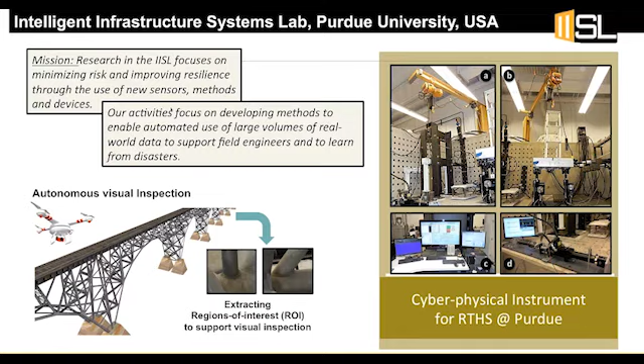Some other things that we do are related to structural health monitoring and looking at different ways to use sensors for gathering information about the condition of a structure, as well as structural control. Specifically, most of what we've done is on magnetorheological fluid dampers and how those could be used to reduce the response of different types of structures, buildings, bridges, or even automotive or aircraft applications.

But on the right-hand side here, you see this multi-hazard engineering collaboratory on hybrid simulation. And this is a new project that NSF funded, the idea being to bring together a group of researchers that can share ideas, that can build capacity for hybrid and real-time hybrid methods toward different types of applications.

This is a field where we need a lot of different input from different types of experts. For instance, we need people in control theory, as well as people in structural testing, as well as people in signal processing, etc. And so what kind of material has to be developed? What kind of theory, what kind of methodologies have to be developed to really advance this technology and turn it into something that can be used every day in our laboratories?

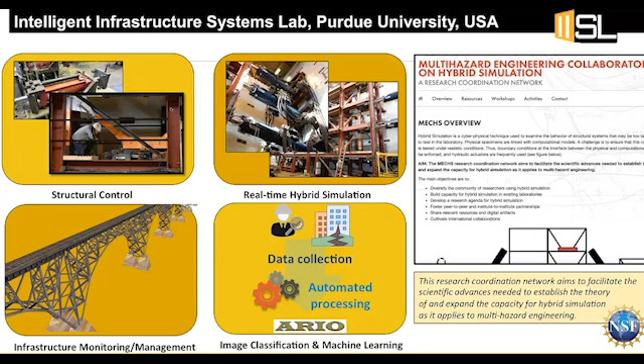So many of you, I suspect, are very familiar with dynamic testing. In civil engineering, we use dynamic testing for understanding our systems, for validating our systems. We do this at large scale because, as Art was mentioning a little while ago, it's very important to study these systems in their realistic condition at large scale, at full scale, if possible.

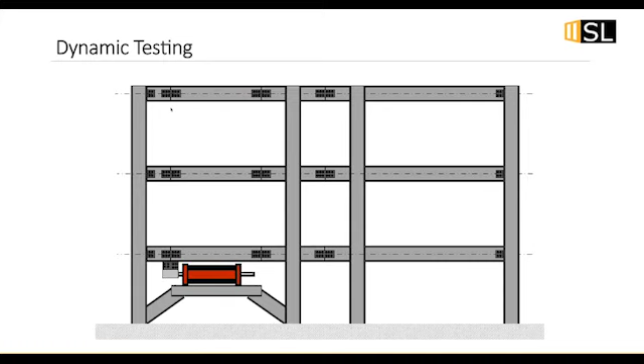This is also true in automotive applications, aircraft applications. We do a variety of dynamic testing. It's always best to test it at the largest scale possible so that we get very realistic behavior. Often in civil engineering, this is done with a shake table.

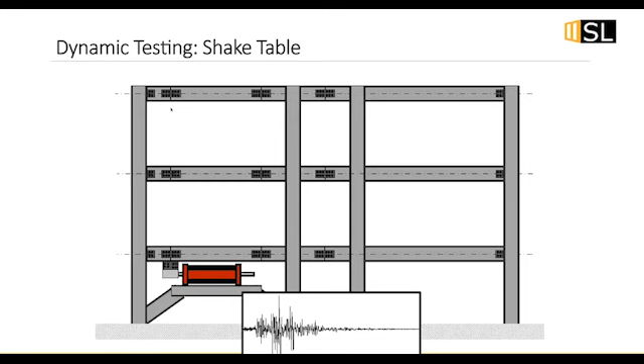This is one of the best instruments for testing full-scale systems under the most realistic situations when it comes to seismic applications. However, there's a great many challenges as well, in the sense of to test things out at full scale, you need something like this.

So this is in Miki City, Japan. This is the largest shake table in the world, and it is 15 meters by 20 meters, and it has a payload of 1,200 tons. This was built in 2005.

It was recently upgraded so that it's now a 6 degree of freedom facility in 2016. But this type of facility is extremely expensive to run as well. So it's very important for those necessary tests, but if you can do things with less cost, more rapidly, studying different scenarios very quickly, then that also gives you new opportunities to test out a variety of things in the laboratory before you take them to a facility like this.

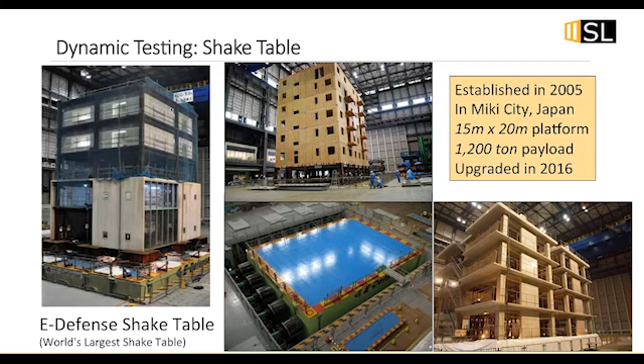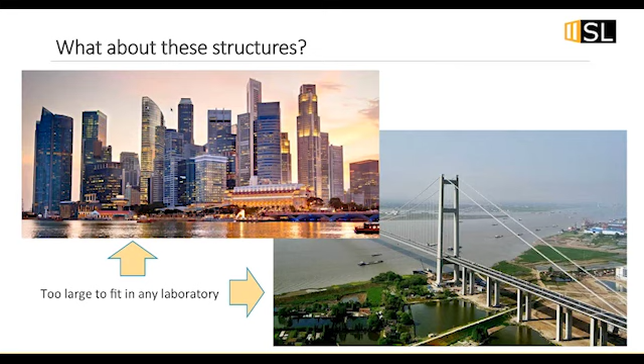And actually, even a facility like this has limitations, right? What happens when we have these long-span bridges, extremely tall buildings? We can't put even these systems in a single laboratory, even a facility as large as this one in Japan. So what we've been doing for the last several years, this is a method, I think the real-time aspect started around 2004 or 5, is to do hybrid simulation at real time.

So this is important if you have a system that has significant coupling between the physical system and the computational system. And I'll talk a little bit about how we break these up into physical and computational systems in a few slides. But real time is important when you have some sort of rate dependence in your system, or when you suspect you have rate dependence and you need to understand it.

But the advantage of this is that we can very rapidly change our computational system. The blue part of this diagram is meant to represent the computational system. The gray part is meant to represent the physical system. And I use a transfer system or a hydraulic actuator or many hydraulic actuators to impose realistic conditions upon that physical substructure based on what my computational model tells me to implement in real time.

So I'm not determining what those conditions are going to be in advance because I don't understand this physical substructure, so I can't model it. The goal is to actually, in real time, take measurements off the physical substructure and impose those on the computational substructure, and then actually bring those back into the physical substructure so that I can understand how it will respond.

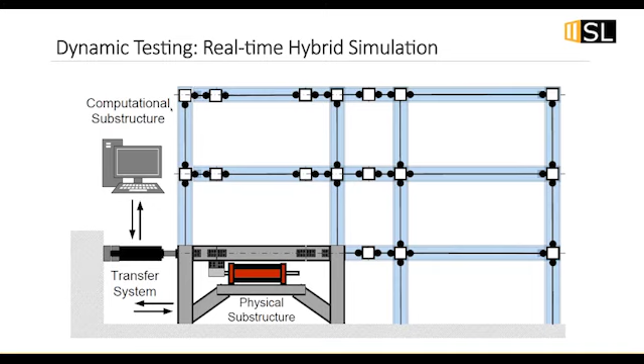And so the idea is to be as realistic as possible, but the advantage is that blue part of the structure, the computational substructure, in just a few minutes I can change to a new model. I can test a different scenario. I can test a different input. I can test it under totally different conditions using the same physical substructure if I'm not damaging that substructure, of course. This can be done with a hydraulic actuator, but it can also be done with shake tables and other types of systems, and I'll mention a little bit about that at the very end as well, some of the newest applications of this idea.

So real-time hybrid simulation is a cyber-physical, time-efficient, cost-effective technique to integrate physical testing with computational simulation. So one of the earliest frame tests that was done was this project that we had at Lehigh. This was a NEES project funded by the National Science Foundation in the United States. And it was a team of researchers, 10 faculty from 5 different universities that were all involved in doing real-time hybrid simulation.

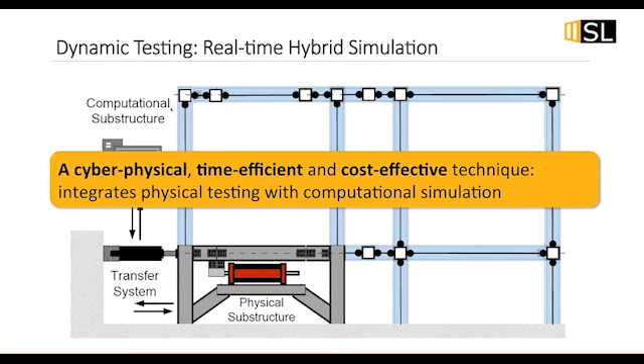You know, we had a lot of success in these tests. We had hydraulic actuators that were very large relative to our specimen, but we also had to deal with control issues that were associated with the actuator dynamics and the control structure interaction. And so this brought up a whole bunch of questions that led to some of the things that I'll talk about today.

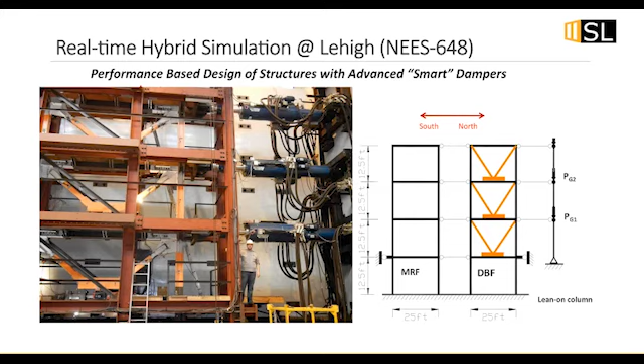So what I would like to talk about today is some of these experiences, how we dealt with those experiences, how we learned from them, and how we developed some new methodologies and procedures which we use to perform real-time hybrid simulations. Now, every time we do an experiment, that's the procedure that we basically follow.

But then I'm also going to talk about this MECHS collaboratory on hybrid simulation, the mission, things that we've been doing recently, things that may be opportunities of interest for people in the audience, but mostly how this community is breaking down barriers and building capacity across the country, across the world, in terms of using hybrid simulation and real-time hybrid simulation methods. And then I'll briefly mention some of the future things that we at the IISL are hoping will propagate through the community and improve these methods even further.

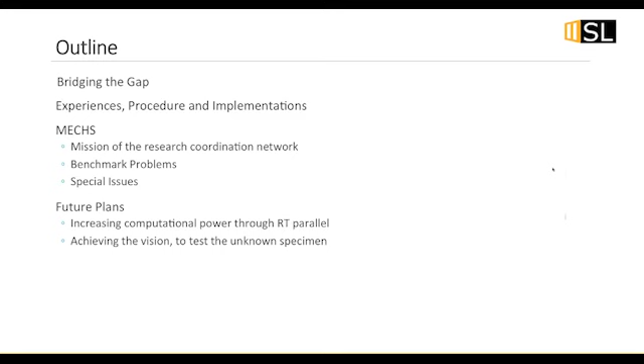So we know what hybrid simulation is. We have a numerical or a computational substructure. We have a physical substructure. We're sending data from our computational substructure into our physical substructure. We're measuring some responses, and we're sending those back. But this actually requires a lot of different expertise, right? We have experimental methods, control, hydraulics, signal processing, data acquisition, all a part of doing that, the physical aspects of it.

On the computational side, we have to have computational modeling methods. We have to know how our algorithms are working for integration. We have to do structural dynamics well. We have to have embedded systems that are able to do the execution in real time for these methods. And then we also have to consider what uncertainties may be present, what noises may be present in our system, and what is actually happening in that test.

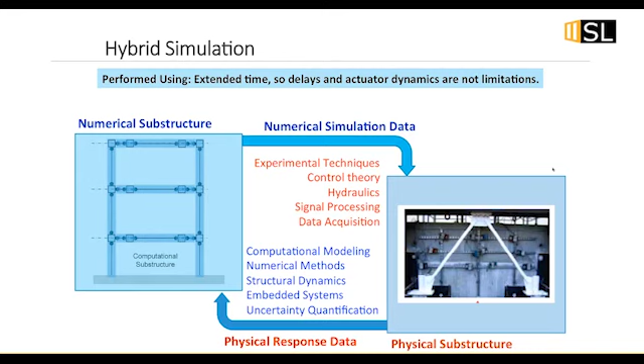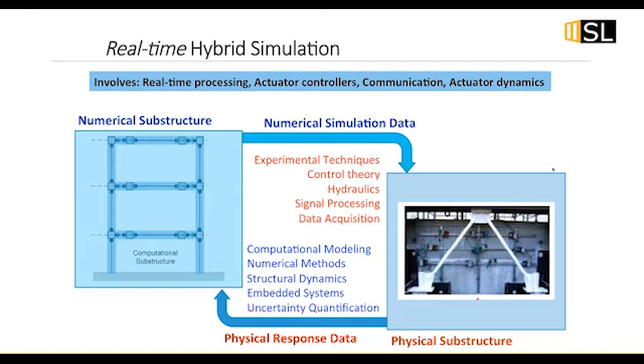When we do hybrid simulation, there's an extended time. We don't have to worry so much about actuator dynamics and the timing associated with that. But when we do real-time hybrid simulation, all of these issues become important considerations. So we want to do real-time execution of our numerical models, of our controllers, so that we can minimize the impact on the results of doing this test in any different way than what happens in the field. Right? Any type of testing in the laboratory is always going to be a little different than in the field, but we always have to minimize that. That's our objective. So we've been looking at these issues.

And if you think about it, this is such a multidisciplinary field. Hybrid simulation is viewed right now as a test method that's primarily used in earthquake engineering, but it pulls in people from all different backgrounds. It pulls in people from data acquisition, the signal processing background, control theory, and thus it seems very complicated on the surface, but it's not really as complicated as it seems, I believe.

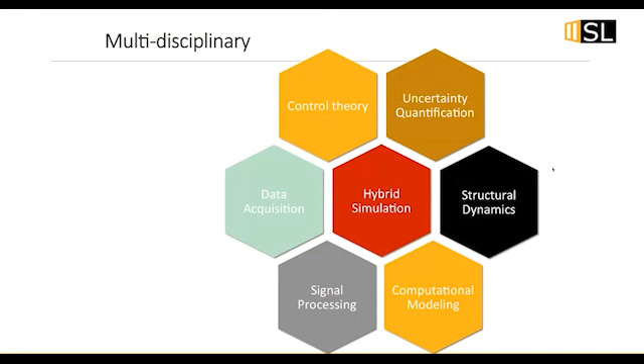But the questions that we've been thinking about are related to what it means to have a successful RTHS. I said that we're always aiming for our tests to be as realistic as possible. One can impose a displacement on their system, and the goal is to achieve some sort of coupling between those systems. But what happens when we do break up the system, and how can we make it as realistic as possible? These are the questions that we've been thinking about quite a bit for the last 8, 9, 10 years. And when are these two systems equivalent?

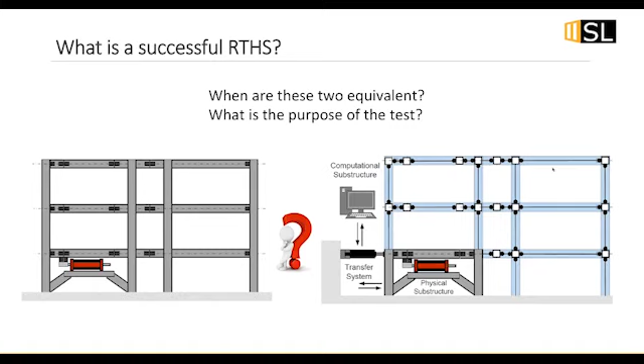Well, equivalence is a concept that depends on the purpose of the test, right? If the purpose is to get strains and stresses out of our structural materials, or to replicate dynamic behavior, or to study a new control device, we may have different meanings for equivalence. And so we need to keep that in mind when we begin such a test: what are we trying to achieve?

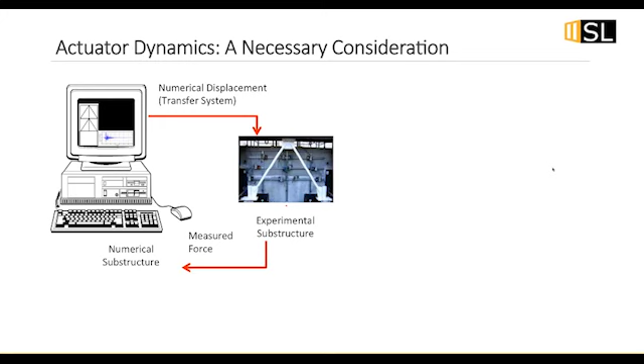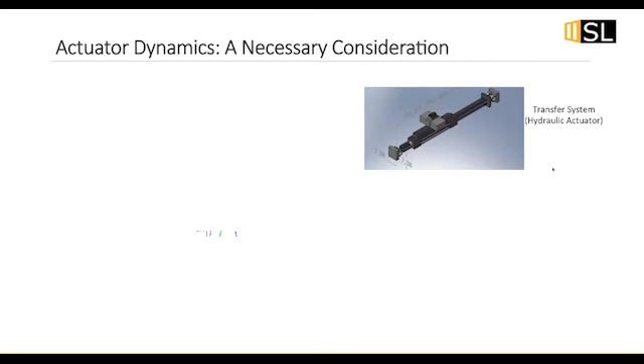The other consideration that we realized a while back, and many other groups did too, I have to say, is that actuator dynamics is a necessary consideration. Say we have our hydraulic actuator, our transfer system: when you send a command to a hydraulic actuator, it actually doesn't respond instantaneously. It has dynamics, just like the building has dynamics. And so our objective is to understand this behavior so that we can minimize the effect of those dynamics in the closed loop.

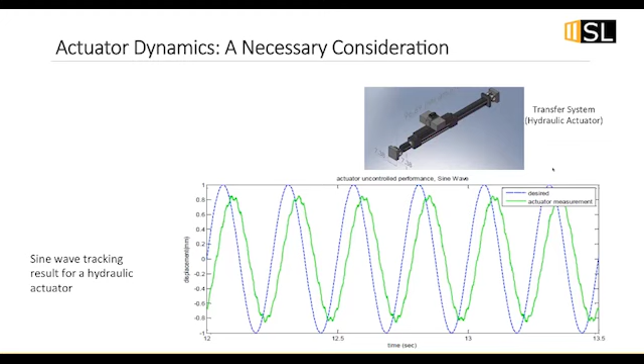So the control system is one of the aspects that we've been focused on, is how do you develop better controllers. You can do this with PID. It's not our method, but it certainly works under many circumstances, but there are extreme cases where you want to do even more.

So if I just close this loop, the loop on the left-hand side, and I take that measured force and I send it to my numerical structure and I compute that and just send the displacement right out of the computer to my hydraulic actuator, then I can potentially have challenges or errors in that test method. So by minimizing this loop, I can get rid of those dynamics, and I have a much more accurate test.

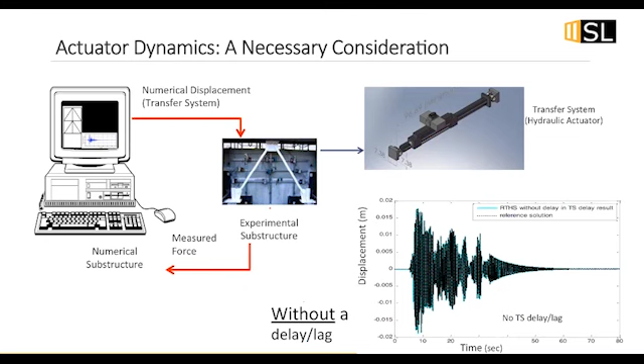So when we were at Lehigh, and in the course of this project, we did some large MR damper testing. So these are pictures of what looks like hydraulic actuators attached to magnetorheological fluid dampers. However, in reality, both of these are hybrid tests. So both of these hydraulic actuators are driving MR dampers using a command signal from a numerical model of a building. And in both cases, we saw unexpected behaviors. This is way back in 2010.

We saw unexpected behaviors because when we changed the characteristics of the magnetorheological damper, for everyone's benefit, a magnetorheological damper is a damper that is controllable. So it has magnetic fluid inside of it. If I change the magnetic field, I can rapidly take this device from something that produces a couple hundred kilonewtons to something that produces a couple thousand kilonewtons.

And when I do that, when I change the behavior of my physical test specimen significantly, then my controller has to be changed as well. This is something that we observed, and we didn't understand it as well at that time as we do right now, but it motivated a lot of the questions that we've been looking into.

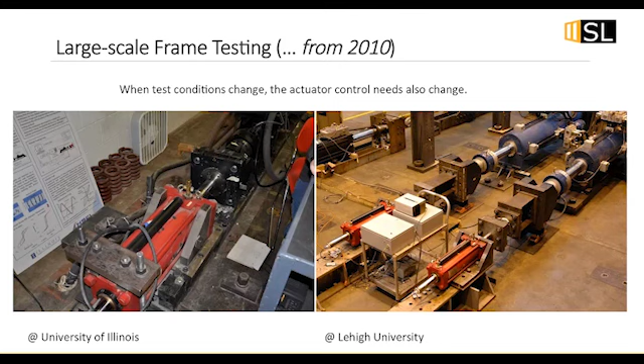So what we've really been doing as a whole is looking at a procedure so that the outcomes of our test are as meaningful as possible, so that if a researcher wants to study a particular aspect of a test, then they can design their test so that the errors are minimized in that portion of the test, so that we have the most success. We have the best set of results toward meeting that particular objective.

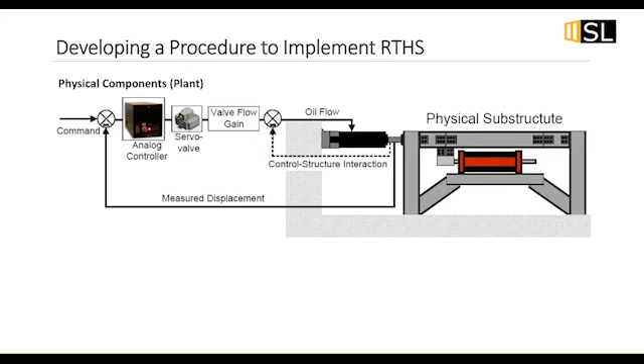And so the things we've been thinking about are twofold. If you represent this test, this is the physical specimen, right? We have hydraulic controllers, we have a hydraulic actuator, and we have a physical substructure. If we represent that with a block diagram, the areas where we really need to understand this are the controller that actually closes the loop and controls the hydraulic actuator, but also the decisions that go into how do we take this physical substructure and this computational substructure and break it up so that our testing is as accurate as possible.

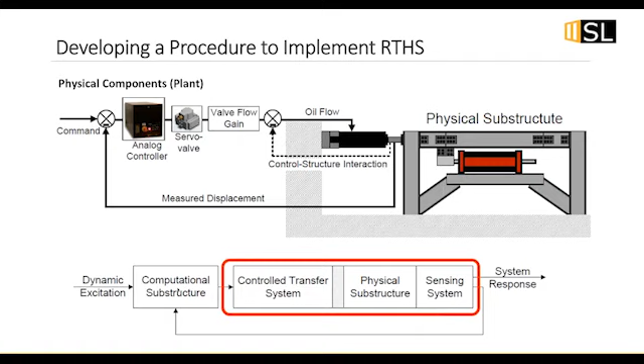It's very logical to do it that way, but we'd find that sometimes the test was very difficult to perform then, and there are ways to choose how to break up the structure so that we can have an easier test to run with more accuracy. So these are the types of questions. We always want to get as much realism, even if the errors are tiny. We still want to get as much realism as possible in our tests, right, to understand our system.

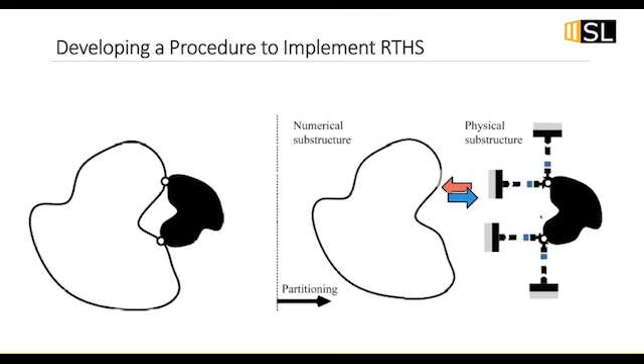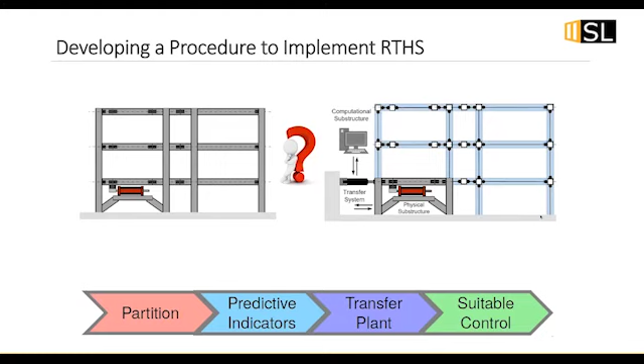So the question is, how do we do what's shown on the right? How do we break up our complete structure into a numerical substructure and then a physical substructure, so that when we attach our hydraulic actuators and we do this physical test, that we get the best results we can? So what we developed was a procedure for doing this, and we did this based on some predictive indicators that were intended to predict stability and performance of the test. So we developed a series of predictive indicators, and this methodology is the result.

So if a researcher chooses a particular partitioning configuration, and they also know the hydraulic actuators they have in their laboratory, they know basically what the characteristics of those are, then they can start with that. They can compute these predictive indicators. They can understand what their minimum requirements are for the time delay in the actuators, for example, for the performance that their objective is in trying to replicate some complete system with their hybrid system, their partition system.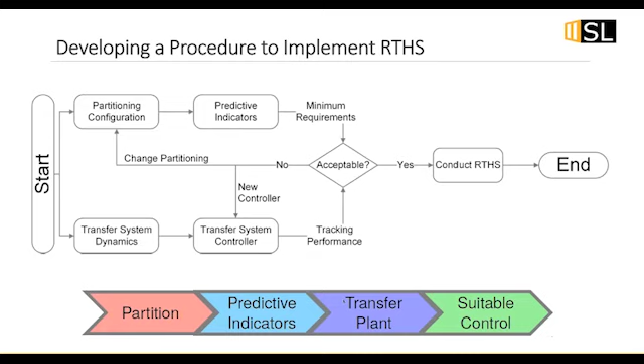Then they can look at designing a controller and seeing if these minimum requirements and the tracking performance are possible. And if that's acceptable, you move forward and you do the test. But if not, before you actually build anything, you have the ability to separate your system into a slightly different system that may be easier to test. That's the objective, to get really good results from the test. So we might want to make small changes to our test setup to allow for the testing to proceed with greater accuracy or for easier ways to do the test. So once you have those predictive indicators, you can design your control system and move forward with the test.

And so we've done this over the years with a number of different experiments. This is one experiment that we did around 2012 with researchers from the Technical University of Denmark, and their goal was to look at wind turbines. They have wind turbines that are out in the ocean, and they have wind and wave interaction that are both affecting the dynamics. They're both exciting these wind turbines, and thus they're not as efficient as they could be. And so they wanted to put some damping devices into these wind turbine towers, and the objective was to use real-time hybrid simulation to figure out how to best do that.

So the inputs were wave loading, and those were basically done as a separate input, just like an earthquake would be input into our computational model. We used wave loading instead as the input to our computational model. And you could envision extending that to many other types of applications, like wind, like roadway irregularities in an automotive application.

The device itself is rate dependent, so we had to use real-time hybrid simulation. But this was a particularly challenging problem because these towers tend to have a very broadband distribution. The first mode tends to be very low, around 0.25 hertz. But the second mode is very high. It's very far removed from that first mode, and it was around 80 hertz. And so designing our physical test apparatus and doing the control design for that test took us a bit of effort. We learned quite a bit in that process.

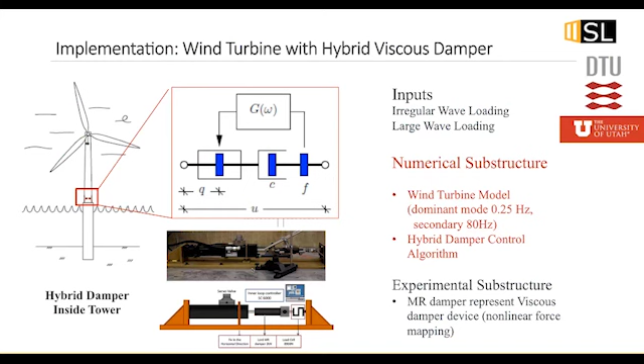But we did this test with 2 different configurations. One was a universal testing machine with a very large actuator, which happened to have a lot of noise. The other one was basically the small setup that you see here, where we have a 2,000-pound hydraulic actuator working with a 1,000-pound MR damper in its on configuration. And both tests actually produced very similar results, different controllers, but both tests were able to produce extremely good results in terms of representing the global behavior of this structure with such a control device. So that was very positive.

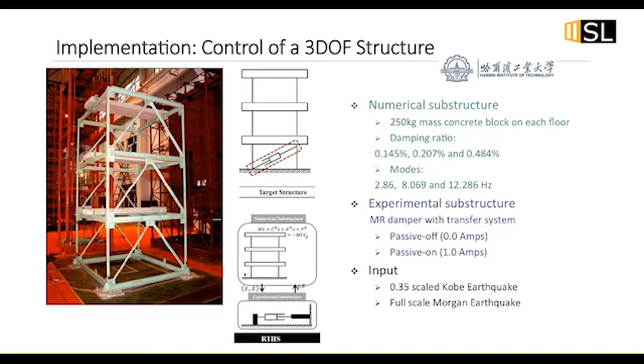Another experiment that we did is very different than these other ones that I mentioned. We used the same numerical model of this three-story frame structure, but we did it for a totally different purpose. And the purpose in this experiment was to validate wireless control and wireless sensors. Because if you're doing a wireless control experiment using MR dampers, you don't want to impose sensor failures on the real system, right? You're going to have large amplitude response, but you can very safely do this in a real-time hybrid simulation mode.

So what we did was we actually used the computational model of this building. We represented the wireless sensors in the computer as well, and then we used the hydraulic actuator and the MR damper as the control device, but we were able to study what happens under different failure scenarios. So we tried a variety of different failure scenarios where data loss might be anywhere from 10% to 100%, which means a total failure of that sensor. And then we looked at how the control system performed under those conditions.

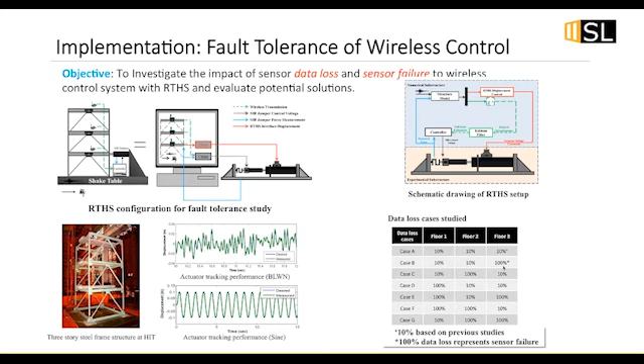So this brings up many possibilities for the future to study. You know, Internet of Things is something we've been talking about. Is there a way to use real-time hybrid simulation to explore the success of the Internet of Things, different types of sensors that are used for different purposes within buildings? And I suspect there's a lot of ways in which that could be done in the future.

Another aspect that we've been looking at is, if you have a system in your physical setup that you don't understand, can you learn from it? Can you identify your models and feed those back into your numerical substructure so that you can improve that modeling capability and you can improve your overall test? So if your structure is actually changing, if your physical specimen is being damaged, can you update the parameters of your model and then continue running the real-time hybrid simulation in that mode?

Now, we did not do this in real time. It was done at about 1/4 speed because the updating algorithm required a tremendous amount of computational power. But what you can see here is that we were able to grab onto the behavior of the physical specimen after a few seconds of simulation and then improve the overall test as it moved on. And so this is another tool that we could pull into RTHS and have at our disposal for improving our test results.

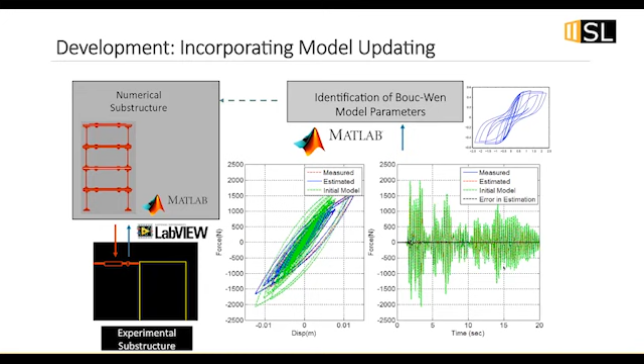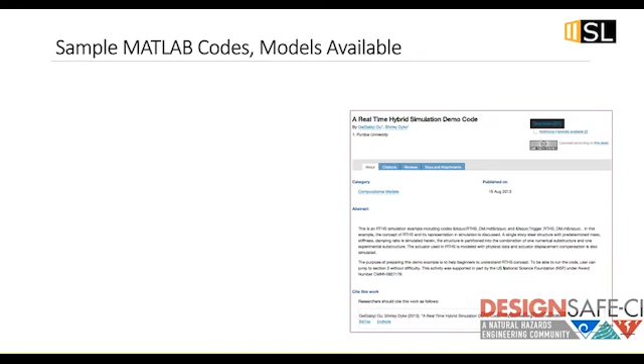So let me talk a little bit about this community. And if you're interested in resources associated with real-time hybrid simulation, we have over the years put together a few demonstration codes. And these demonstration codes are posted for anyone to grab and try out. One of them, the one on the right, the first one, was focused on simply demonstrating real-time hybrid simulation and the effects of actuator dynamics. It's a short MATLAB code that anyone can download and try out on their computer. It does not run in real time.

It's a very simple code. The second one is a demonstration of the same thing for base isolation. And the third one is actually a virtual real-time sample code that is meant to be run on 2 different computers in a distributed sort of environment.

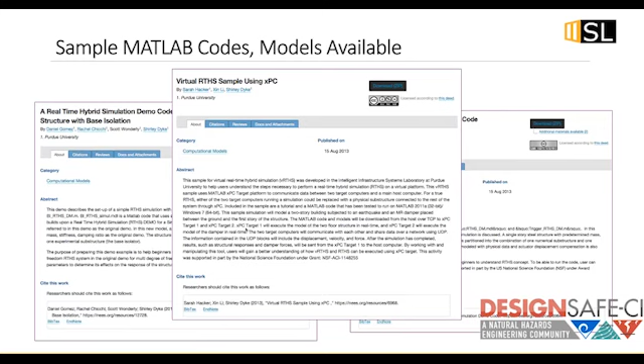So you can actually use this, download it. It requires MATLAB's xPC system, but you can actually download these if you want to learn something about real-time hybrid simulation and you don't have a lot of experience with actuator dynamics and such. These are tools at your disposal, and they are posted in DesignSafe. I'll show you the link in a few more slides.

But this leads me into this research coordination network. So the National Science Foundation, a year and a half ago, has funded what's called a research coordination network, which is a virtual community. So the idea is that maybe once a year we get together and we talk about the needs within this community, but most of the time we're all interacting virtually through this website.

And we did have our first workshop back in December. That was held in San Diego, and it was titled Breaking Barriers and Building Capacity. And the goal was to get together and start working on a research agenda.

What theories and what methodologies, what techniques need to be developed to advance the testing methods associated with different types of hybrid simulations so that we can extend these into more testing domains, go into other disciplines. Basically, we can just make it more powerful and more useful to people in the community. So what questions can we all work on together?

And there's three main goals. One is establishing partnerships within the United States and around the world, both trying to work together with researchers of common interests. The second one is building capacity. Building capacity means bringing this technology and this possibility to people who have not used it in the past. And the third is this research agenda, which is posted on the website as well.

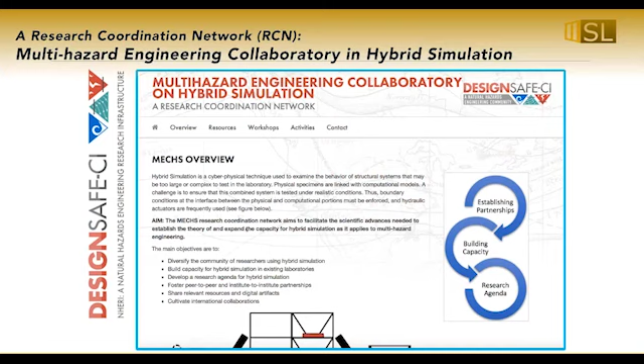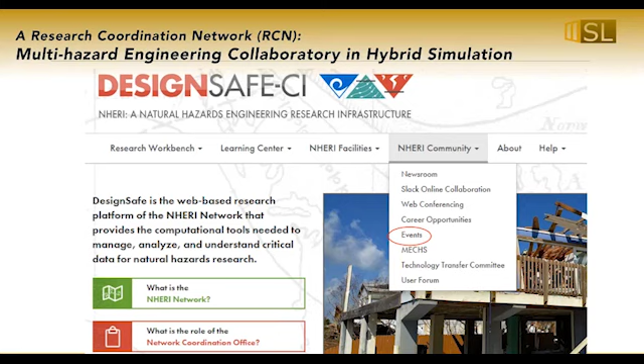And so this is a website. I'll give you the link again at the end of the presentation, but this is what our website looks like, the purpose, the information that's available. You can get to it through designsafe-ci.org. And we have a series of workshops. We're going to have one every year, basically, to talk about these methods.

But we also have resources. And the resources are being updated all the time. There are the tools that I showed you earlier, that's samples, and there are a series of reports going back to the history of early hybrid simulation methods that are posted here, but going as far forward as the recent journal papers and the primer and dictionary that was developed for researchers that are new to hybrid simulation so they could get comfortable with the terminologies and the ideas and the methodologies without necessarily worrying about how do I do it in the laboratory yet.

Another item that's posted is a benchmark problem. So benchmark problems are useful. They've been developed for the last 20 or 25 years in the structural control community and the structural health monitoring community. But the idea is to have a common problem where different researchers bring different methodologies and try a problem, a single problem, figure out how they would tackle that. And we've built a benchmark problem in real-time hybrid simulation that was just posted a month or two ago.

The focus of this is on designing the transfer system tracking controller. So this has the physics-based models of the control structure interaction, the physical substructure, finite element models are there. Everything that you would want for a straightforward single actuator real-time hybrid simulation test is provided.

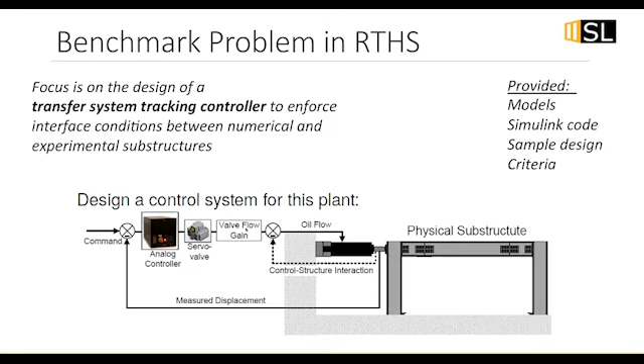The models, the Simulink code, and then we also provided a sample design that is not meant to be a very strong design. It's just meant to give you an idea as to what researchers may want to do with this, and then methods to evaluate that. So this is available as a code package and a paper for anyone to download and use.

And once that is done, we also have a special issue of a journal that is going to be coming up. The deadline is the end of the year for the paper to be due. So if someone's interested in doing research on this topic and they want to understand real-time hybrid simulation, they want to try this problem with their own methodologies and then write a paper about it, there's going to be a special issue.

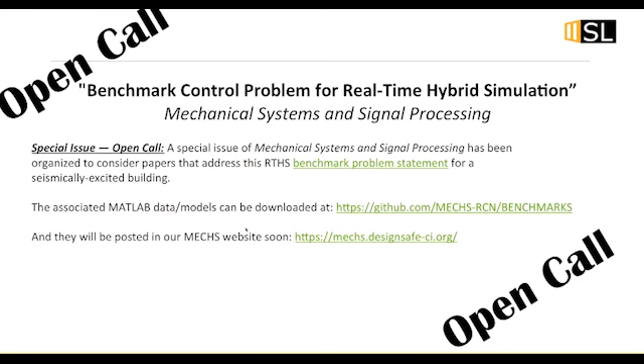So in summary, hybrid simulations are expanding the types of tests, and they're very useful for understanding global response and many other purposes that you might have in mind, validation, for example. But to utilize these methods, it's very helpful to think about the configuration of the test and how you're going to actually perform the test, what control you might need in order to be the most successful that you can, have the best outcomes of your test.

And it has strong potential for many other applications. In addition to dynamic testing, in addition to earthquake engineering, complex systems, anything with significant interactions does offer this as a possibility. Many of the things have been related to smart structures and control devices that are done by changing the setup, changing the computational model rapidly.

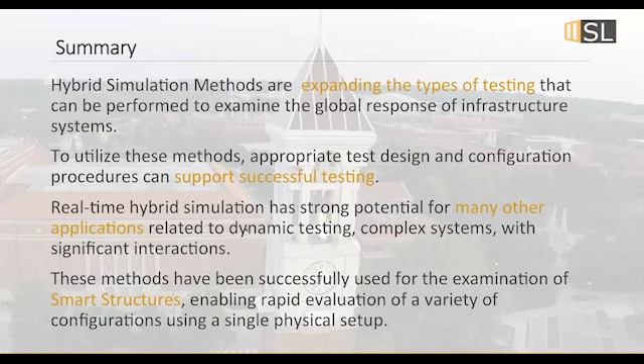A couple of future directions I'm going to mention. One is the fact that when we're trying to do RTHS, often we don't know what the physical specimen is. That's the purpose of the test. So we've been focusing on self-tuning controllers that are suitable for these types of systems with uncertain dynamics. We don't understand the dynamics completely. We might have a rough idea as to how much force it's going to provide and when it might break, but we don't really understand how to model that system.

So we've been testing this on this little device at the bottom, which is just mass and a stiffness element that breaks. And we've found that when we put a controller on it, on the right-hand side you see the response: even though my device has broken, which occurs right before 3 seconds, and I have a force dropped from a high force level down to 0, my controller continues doing what it's supposed to do. So that's a good sign that this controller is suitable for real-time hybrid.

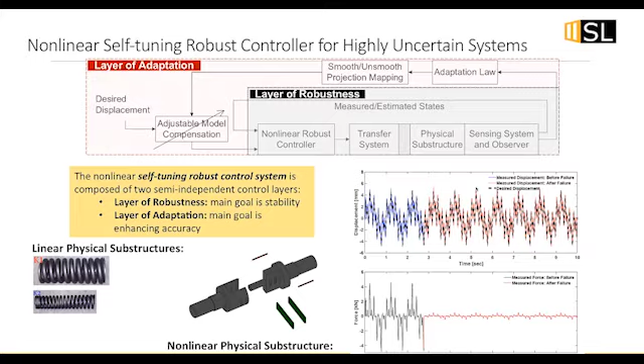We've tried it in some other tests. I just haven't been able to update those figures. But we do have some implementations of this for closing the loop with real-time hybrid simulation as well. And the other thing that we're focusing on is how to do more computation in that tiny amount of time.

So right now, one of the limitations is that if you have a single processor able to do real-time processing, the computation is limited in your finite element model. So if we have the ability to parallelize that and actually do the computation in real time, then you have the power to run much more complicated finite element models with these tests. And we've been looking at ways to schedule the tasks on parallel computing so that we can actually achieve that. We have done this with parallel computing, but actually controlling and scheduling the tasks is something we're thinking about for the future.

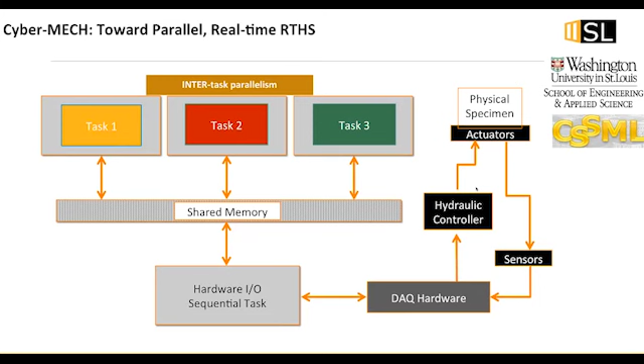And just briefly, let me mention the Natural Hazards Engineering Research Infrastructure is something that is relatively new, funded the last 2 to 3 years by the National Science Foundation. It includes many labs, but what I want to mention specifically is that hybrid simulation is moving into the wind community. And so this is the Wall of Wind at Florida International University, and they have some projects that are just starting up on how to use hybrid simulation and real-time hybrid simulation. The issue here is that the computational burden becomes even more challenging because they're trying to simulate things at 20 times the speed of an earthquake test, for example, 20 times the speed of the real world.

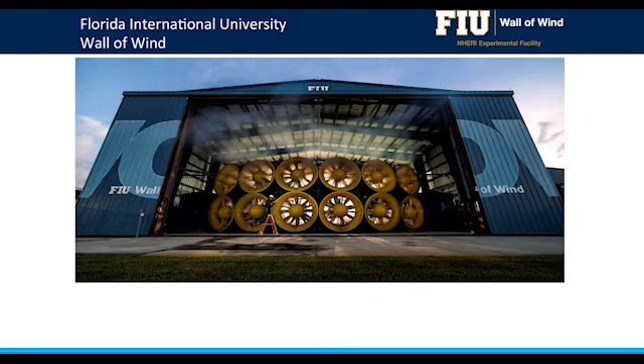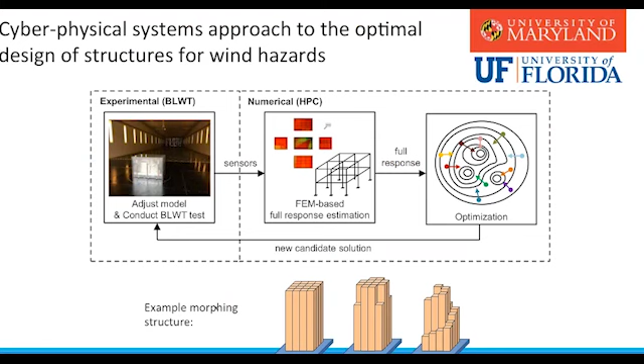And at the University of Florida, they have a nice wind tunnel shown here on the left, which has a lot of versatile capabilities to change the terrains in a quick way. And so they're looking at a version of real-time hybrid simulation where they're actually morphing the structure so that they can understand how to best create the right wind profile that they're interested in. So I'm not going to say a whole lot more about those, but these are futuristic applications. They're starting to come online right now in terms of wind engineering, and so there is a wide variety of interests and different communities that are working on hybrid simulation and real-time hybrid simulation.